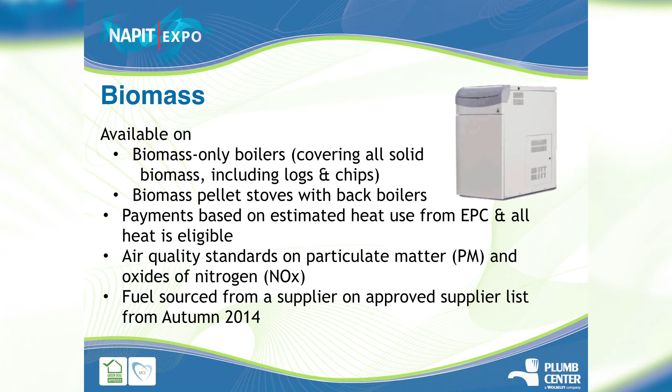The payments are based on estimated heat use, as I've already said, which is defined by the EPC. There are air quality standards for biomass boilers, and there is also a fuel standard. Every year, if you're a consumer, you must declare that you have bought only approved fuel. If you are a self-supplier, cutting your own timber, you're allowed to do that, provided that timber comes from your estate. That doesn't mean you have to have a whole estate, it just means within the curtilage of the area you own. You're allowed to do that, but you must declare yourself a self-supplier.

Otherwise, you choose the fuel from the approved suppliers list. That list is actually available now. It is not mandatory until next autumn, but if you're sensible, you use that fuel now.

Heat pumps have some rules. They have to have a minimum seasonal performance factor (SPF) of 2.5. That's not just the heat pump, that's the system in which it sits. So the heat pump itself must prove to have an SPF, but using the MCS heat emitters guide, you apply that to the whole system, including the distribution system, and you must come up with an SPF of 2.5 or more. That's an EU standard, and it says that if it's anything less than 2.5, it's not actually generating renewable heat.

Now, the one difference between heat pumps and biomass is that they're only paying for the portion of output which is deemed to be renewable. That means they won't pay on the amount of electricity used in actually running the plant. So for example, if we've got an SPF of 3, they won't pay on 1/3 of that, because with a 3-to-1 ratio, that 1/3 is not renewable. They'll pay on 2/3 of the output. If you need any clarity on that, please come see me afterwards.

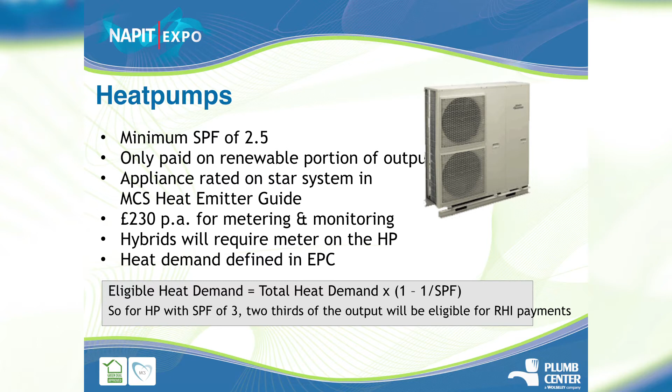If you want metering and monitoring, that's an option you can choose, and you'll get an extra payment of £230 per annum. The one circumstance where you will need to meter is if you retain a fossil fuel device and have what we call a hybrid system. So you could retain your gas boiler, oil boiler, or whatever your existing heating system is, and fit your heat pump to run with that. However, you'll then have to meter the system, because the Department of Energy and Climate Change don't want to pay on any energy used by the remaining fossil fuel system. So hybrids are possible, but unfortunately we will have to meter the system.

Solar thermal, available on evacuated tube and flat plate, as I've already said. The really great thing about solar thermal is you're allowed to have it alongside either of the other two technologies and claim 2 tariffs. So you can have a heat pump or biomass and solar thermal, and claim both those tariffs. I think that's actually a very realistic circumstance for many people. Using solar thermal for high temperature work would certainly mean a heat pump works much more effectively. All the heat's eligible and all the heat's deemed. There's no circumstance where you'd have to meter, and solar thermal can be fitted with either of the other two heat sources.

The tariff is actually capped at the maximum. The 19.2 pence is the maximum the government is allowed to support for any individual technology, and that cap is actually defined by offshore wind, believe it or not.

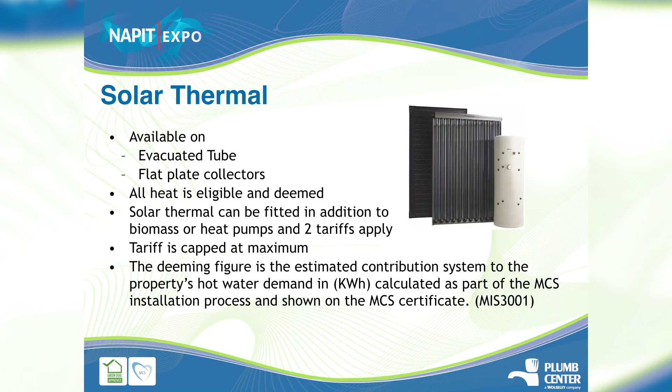So the deeming figure, as far as solar thermal is concerned, is done as part of the MCS installation process. It's shown on the MCS certificate, and that's the figure on which the tariff payment will be calculated.

Now, this is a phrase you'll probably only hear once in your life: Ofgem have done a really good job on the application process, unlike the non-domestic scheme, which is a living nightmare. However, the domestic scheme is a really good application process.

It's an online process, so you go to the Ofgem website, and the household has to present 3 key bits of information: the MCS certificate number, clearly marked on the certificate which the MCS installer must leave; the EPC number, again a hard certificate that must be provided; and the Green Deal Advice Report number. Those are the 3 bits of information required, and that's all that's required.

You don't have to provide the certificates themselves. The system goes away and interrogates the landmark database and the MCS database, and brings that data back into the application. So very, very simple. On top of that, there are a few declarations the householder has to make - that they won't be moving, they'll keep the product working, and if using biomass, that they'll use only accredited fuel stuffs.

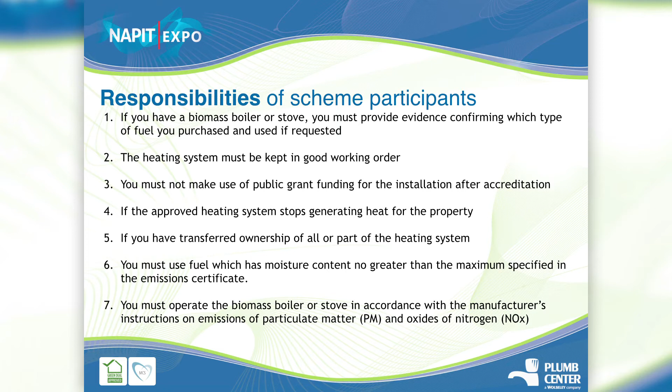As far as the homeowner or renter is concerned, there are some basic responsibilities which are common sense really: the system must be kept in good working order, and they mustn't have had any other finance from government, so no other government support, etc. So that's the declarations the householder has to complete, including the one about biomass fuel stuffs and any standards.

And there is a helpline as well, which you can ring up should you need any direct guidance. So really quite well put together.

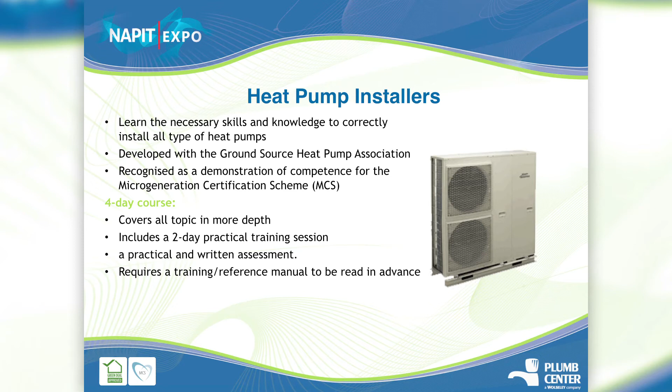To be MCS accredited, you have to have a competent person scheme in the technology that you choose. MCS accreditation is by technology. So we have an expert on hand to talk us through this.

I'm here just to talk to you about what NAPIT are offering in regard to training. MCS are now becoming quite strong in their opinions and what they want to see happen, which is right. We want to see good installs done, and part of what we're talking about here is the RHI technologies.

The reason we do these courses is for competency level. You want a competency level so that you're going to do a good job, the customer is going to be satisfied, and the industry is upheld as being viable alongside all the other industries we're trying to compete with. As you see on slide 1, we've got a heat pump installation.

The courses we do don't just cover the air source heat pump, they also cover ground source heat pump. It's been put together in conjunction with the Ground Source Heat Pump Association, and this is a course you'll find is in-depth.

It's a 4-day course, and one of the things we spoke about at NAPIT is that we understand your time is precious. Any time lost on site does impact tremendously, especially if you've got a lot of lads on courses.

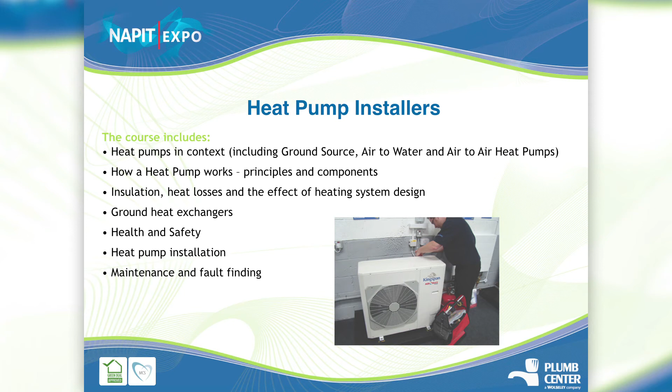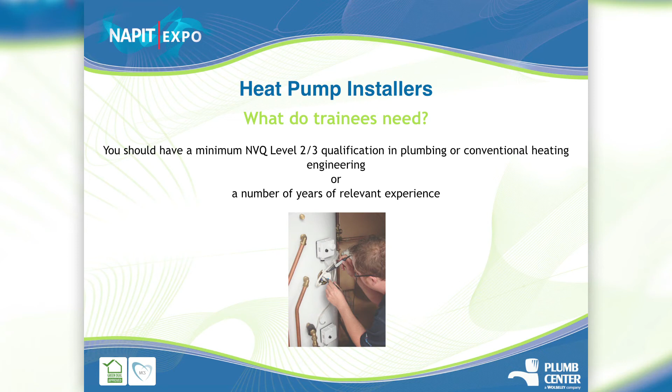What do trainees need? Well, the minimum the course requires is a level 2-3 qualification, NVQ level 2-3 in plumbing or conventional heating engineering, or a number of relevant years of experience. There is an MCS document, MCS 025, that talks about competency criteria and relevant levels or years of experience. But that's basically what you need to do the heat pump course.

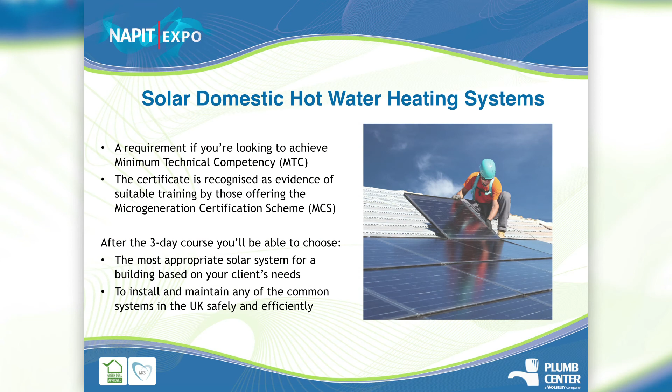Solar domestic hot water is commonly known as solar thermal. Tim mentioned this requirement - you've seen there's a really high premium payment for solar thermal. It's a good course. Most guys say, well, I'm a plumber, I'm a heating engineer, what do I need solar thermal for? Well, the big one is that it helps you self-certify the installation.

It's also part of what's required under the MCS, and we've condensed this course into a 3-day course. The course is really good, again hands-on, and the training centre is really well equipped. You come out with that qualification.

So in this course there's a criteria on what you need to have and what you need to do. The big one, I look at this as the plumbing layout and design of solar hot water systems. People say, I'm a plumber, I should know how. No, it doesn't work like that. This is a different system.

What do you need to take the course? Well, again, it's the same NVQ level or a demonstrable amount of years of experience, and domestic vented and unvented hot water system certificates - that's an important part of this course. There's a lot of guys out there - we'll talk a bit more about the unvented and vented hot water storage systems. You're not supposed to be fitting a system without the qualification.

You get the course manual and also a DVD, and the DVD is quite informative. It's not like one of these you go, oh yeah, I don't think I'll watch that, I'll put it to one side. It is quite informative and quite an intensive course, believe it or not. It has 12 modules, there's no practical with it at all. But once you've passed the assessment, you'll gain a WRAS and BPEC water regs bylaw certification and competency card.

All you need to do is have a knowledge of the plumbing and water industry. The course is for gaining an understanding of water regulations, particularly for those who want to become an approved plumber or contractor, especially with the water companies.

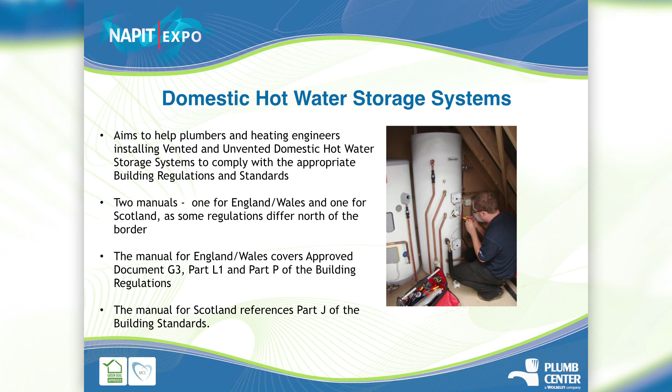We quickly mentioned this before, domestic hot water storage systems. This is commonly what guys call unvented or G3, but the actual title is domestic hot water storage systems. It covers vented and unvented hot water storage systems. As you know, there was an unfortunate death of a child in regard to a vented system, and this covers both systems.

As we said before on the heat pump, you have to have this qualification to do the course, along with biomass, heat pumps and solar thermal.

When you're talking unvented, we're talking very high pressures - it's potentially explosive if it's not fitted correctly. I do some inspections for NAPIT, and you see guys who are electricians who've hired a plumber in, and the plumber's just basically created a bomb. I don't know if any of you have seen Mythbusters, where they explode that cylinder - they shut off all the blow-offs on it, and it launches 40 feet into the air. So when you're dealing with unvented especially, this is a course that you really do need to understand.

As I said, the aim of it is for understanding. There are 2 manuals with this, one for England and Wales and one for Scotland - again, different regulations north of the border. The manual for England and Wales covers approved document G3, Part L, Part P of the building regulations. It doesn't give you the qualification for Part P and Part L, it just talks about them and what you need to incorporate when you're doing an unvented or vented cylinder. The manual for Scotland is Part J of the building standards.

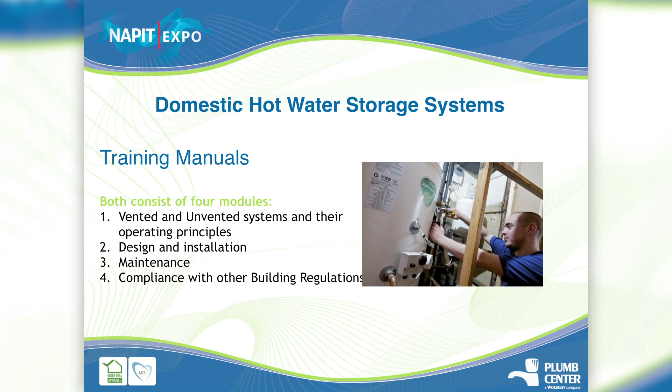The training manuals consist of vented, unvented systems and operation principles, design and installation, maintenance and compliance with other building regulations - another important aspect. A lot of guys fit one thing and say well, that's got nothing to do with me. Yeah, it does. Once you fit an unvented cylinder especially, there are certain regulations that you have to take into consideration along with your installation.

One of the problems with vented, especially unvented cylinders now, is they're not being notified, and it is a requirement that they are notified under the building standards.